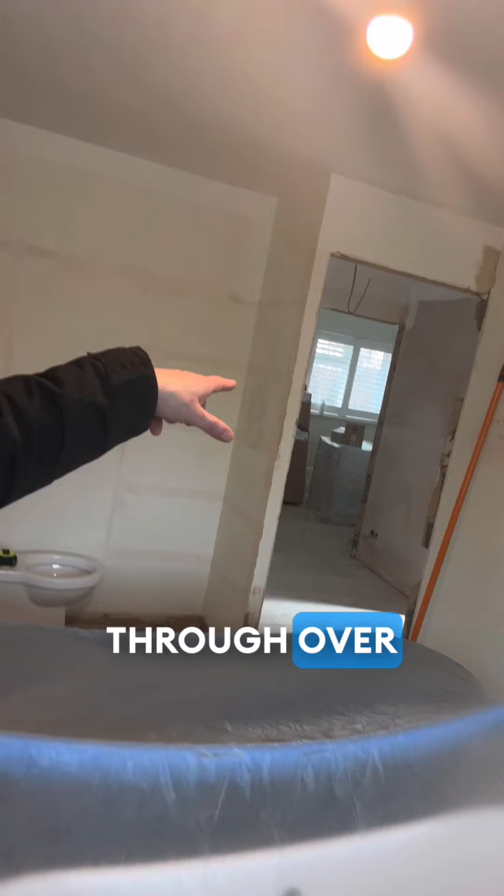So I'm just on site, thought I'd do a quick video. As usual, find somewhere to make up a little table to do your drawings. I've got that set up. I've got a wall here where we're going to have a wardrobe, and through there we have another one. So I'm going to start on this wall, taking measurements and putting it straight into SketchUp.

SketchUp's open, ready to go. I've got my laser level, my Unilight tape measure, and my Bosch laser measure - these are pretty much the only tools I use for site visits.

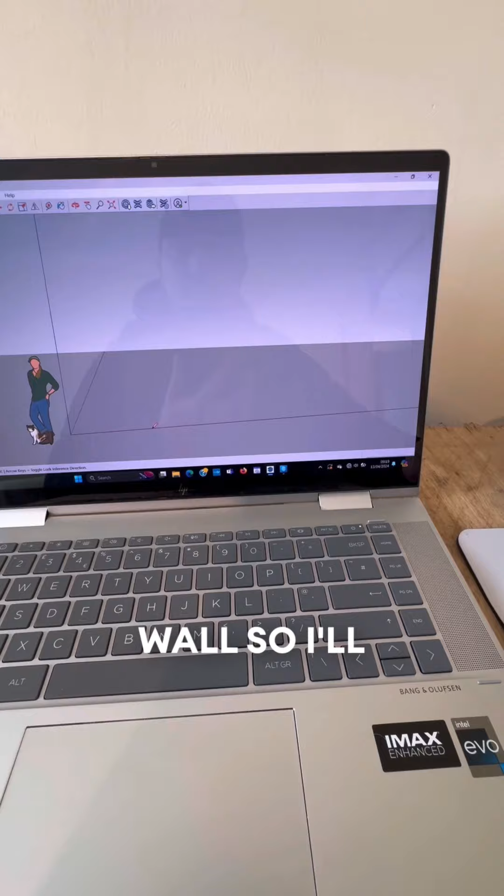Next step, I'll draw the back wall, starting with my point and working up. I'll use my laser and get my height, and I'll always double check. Oh, quite a difference - we'll make a note of that.

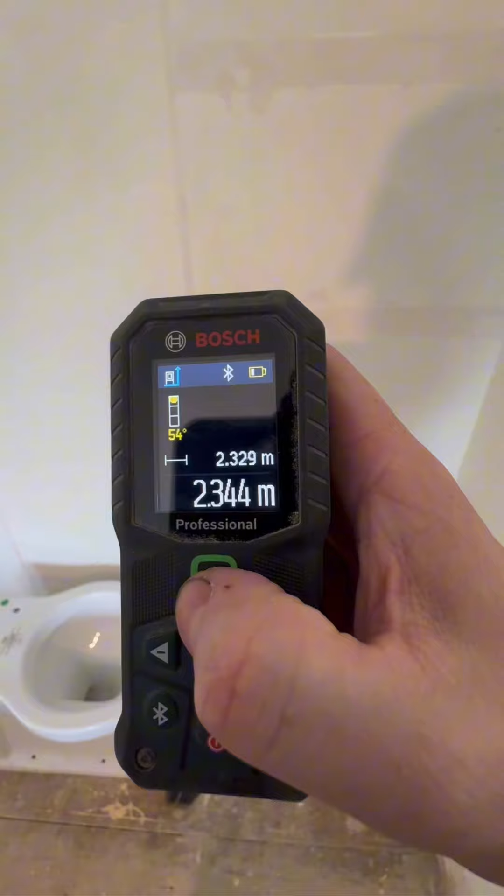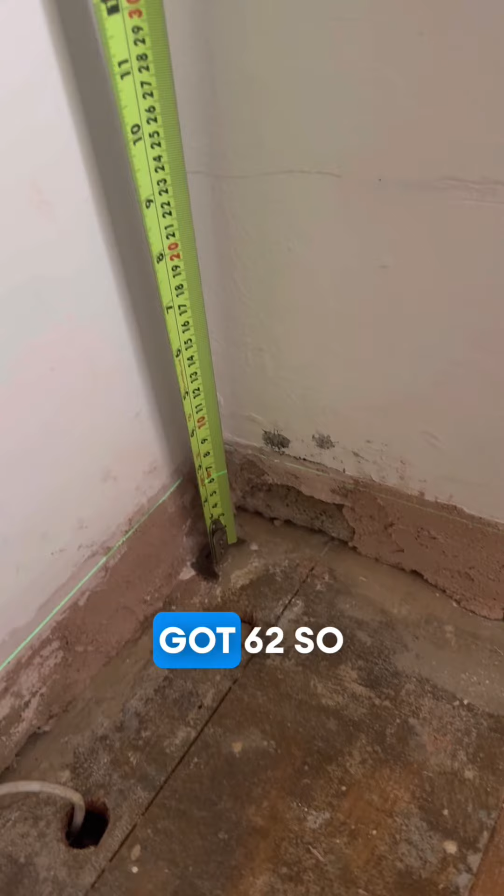Now I'm going to get my laser and check where it's running off. So in this corner we'll check, and then we'll check this corner. On the left we've got 50, and on the right we've got 62. That tells us the lowest point of the room is on that side, so note that. After drawing in the width and height of the room, we can tell how much the floor dips off, so I'm going to work from this point up, allowing enough scribe to cover the difference.

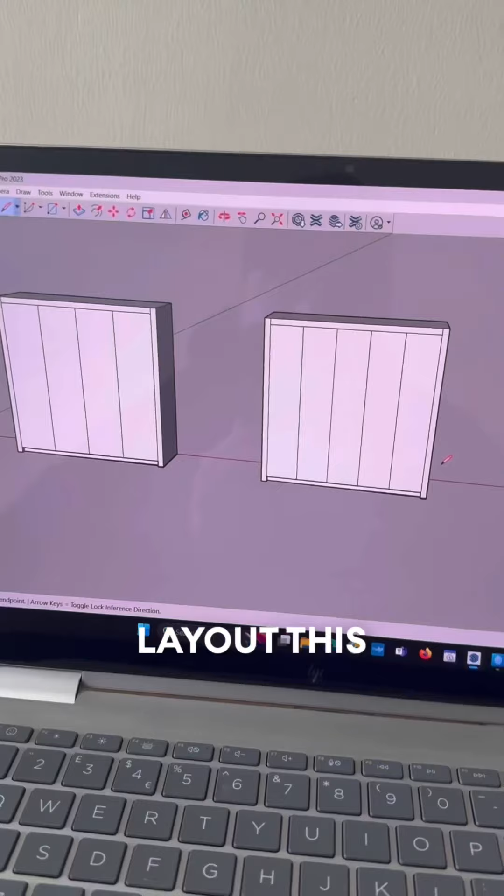Next is to work out the layout. This gives them two options on this wardrobe - a 4-door or a 5-door wardrobe. I always prefer an even number, but this makes the doors a bit more user friendly in a room of this size. So I'll offer it to the client and work from there.

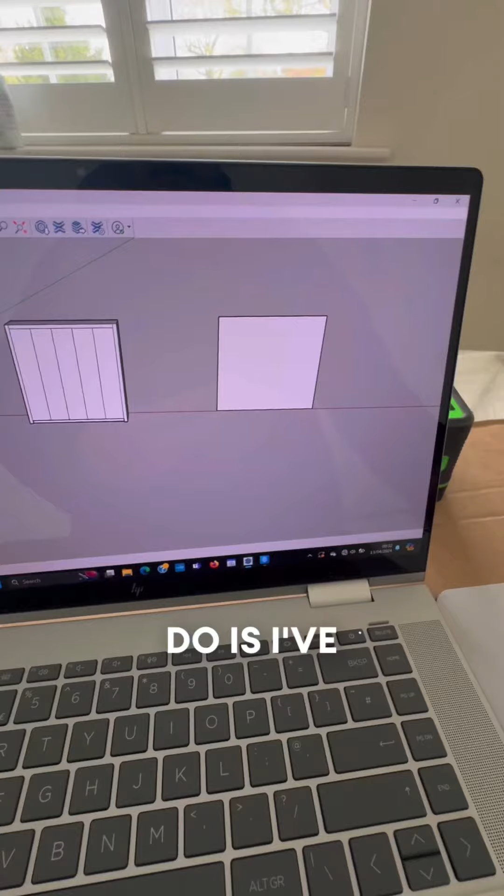I've just quickly popped into the other room before talking to the client. I've drawn the layout - it's pretty level in this room, so we're going to pull the 600, and then I'm going to offset it by 80, and then finish that off.

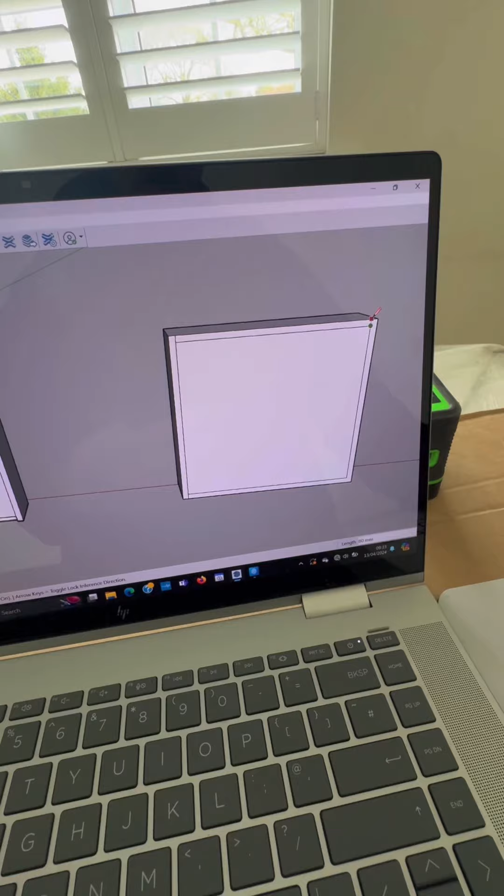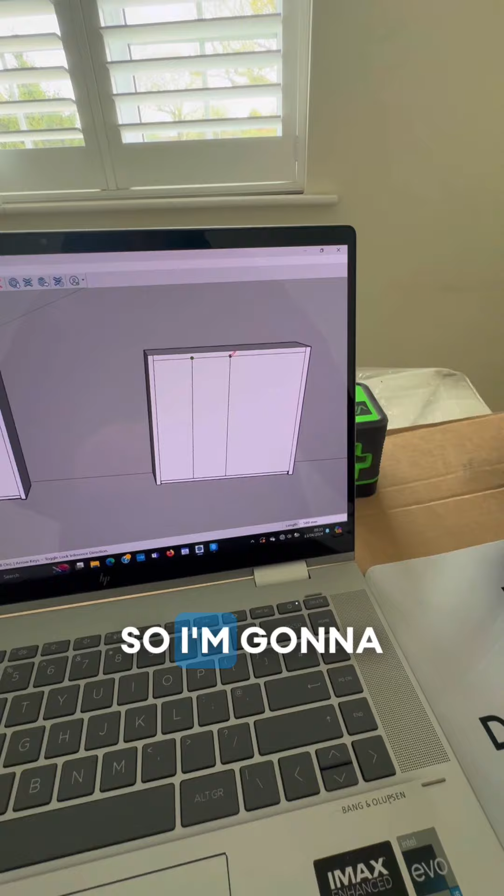Then I'll push the plinth back 50 mil, and find the middle to see about splitting it and see what we're working to. 589 personally is too big, so I'm going to come back and try to work out either 5 or even 6 - we'll see what it works out at.

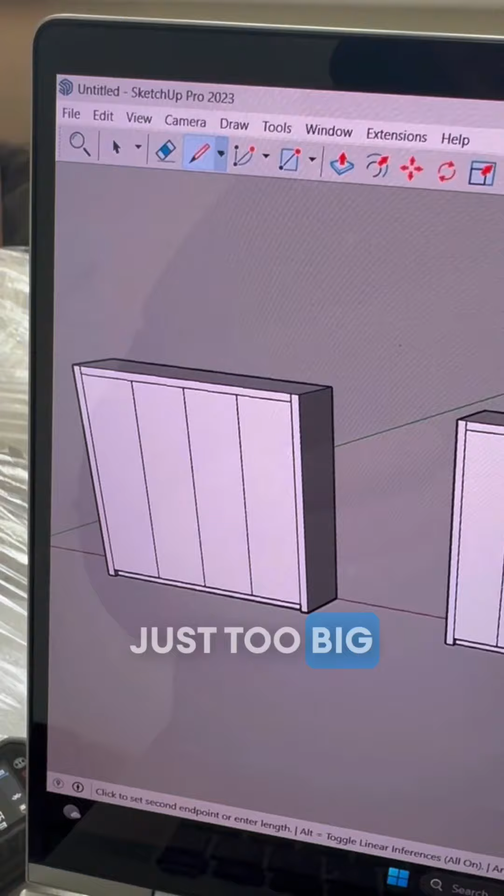Yeah, I think it's going to be a 5 - that's 471 per door, so I think that's a better option. 6 is too small, so this time around I think we'll just suggest 5 doors on both rooms, as I feel 4 doors is too big for a small house. Let's see what the client says.

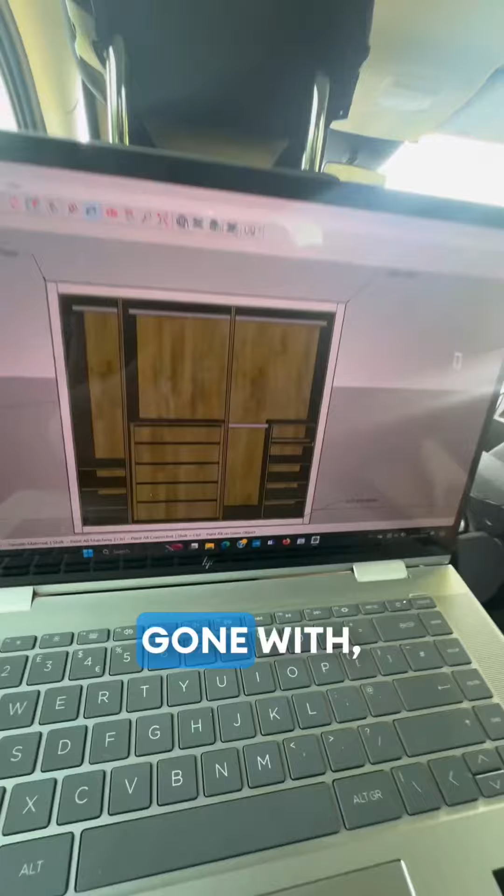So just come out of the meeting, doing a couple of tweaks before I leave site. We've gone for a shaker style door with 2 panels on each door. The insides for the master were going to be Alyssa oak, which we've gone with - I was able to show them the sample, so they're going with the Alyssa oak Finsa board.

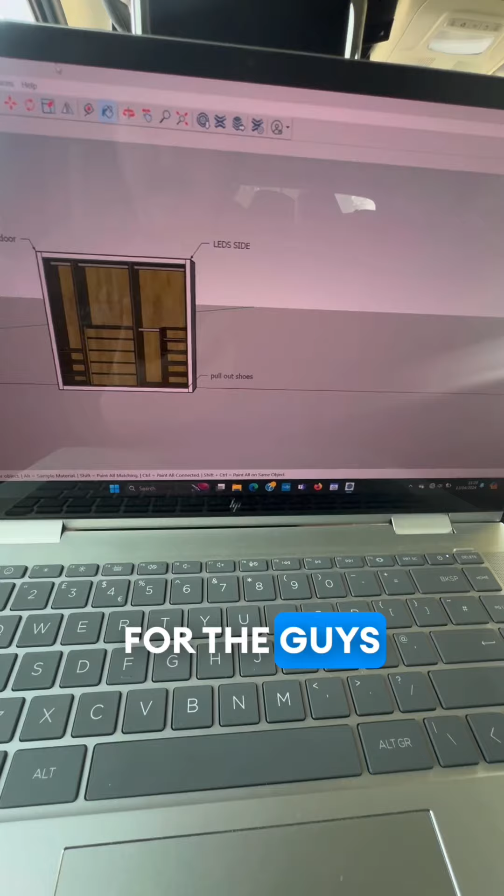It's showing up a bit dark on this, but I can lighten it. We've gone for 5 drawers, chrome hanging rails and adjustable shelves. These are going to be pull-outs for shoes. I've noted LEDs, and I've also noted that this one has a mirror on it for the guys at the workshop. On the next one, we've gone with another shaker style, very similar but internally slightly different, with 4 drawers.

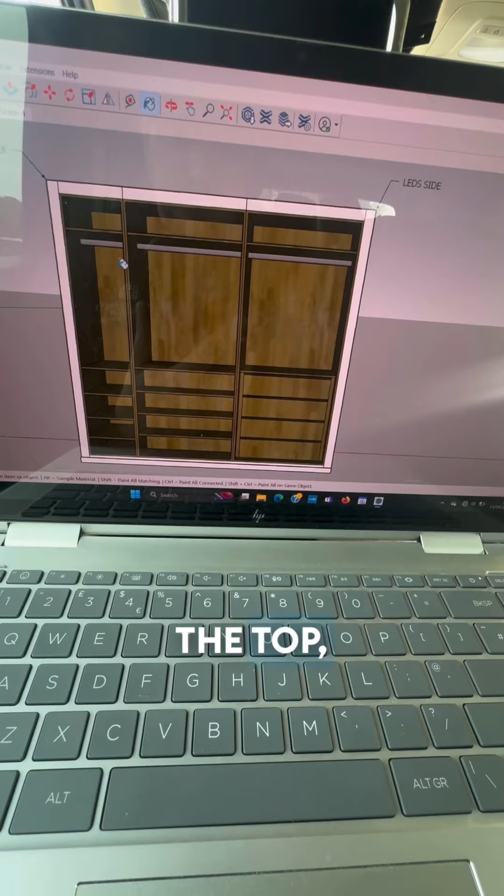On the right, there's pipe work coming up through the floor which I need to double check before going ahead with manufacturing, but we've brought the back forward, so shallow shelves at the bottom, hanging on top, adjustable shelves on the side, and long hanging if needed on the left. LEDs down the sides, which I've noted on top, and the pipe work mentioned just to remind me. Like I said on the original one, I've noted the floor difference, highlighted in red for myself.

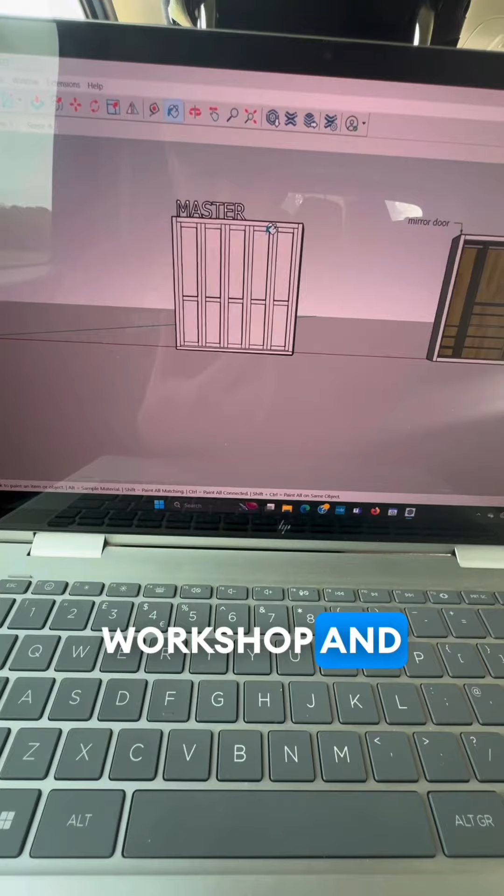So now all I need to do is go back to the workshop and smash out a cut list, which shouldn't take too long, and then that's ready for manufacturing when the client's ready. Hope you enjoyed that.